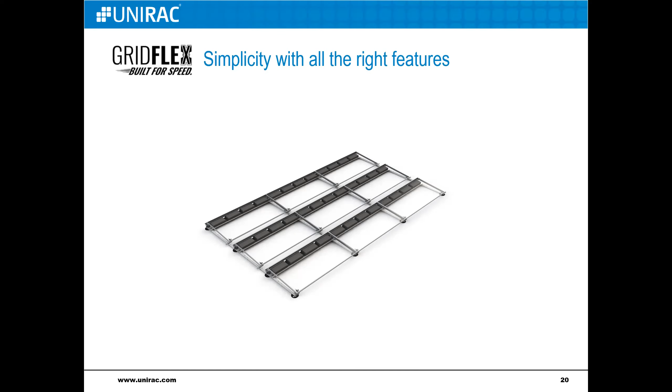So first we'll just walk through the components and give a little tour of GridFlex. This is the array with some clear modules so you can see everything there. The foundation of the system is a network of rails that run north-south. They are hat channel shaped. They're very robust compared to other grid-based low slope ballasted systems that are out there.

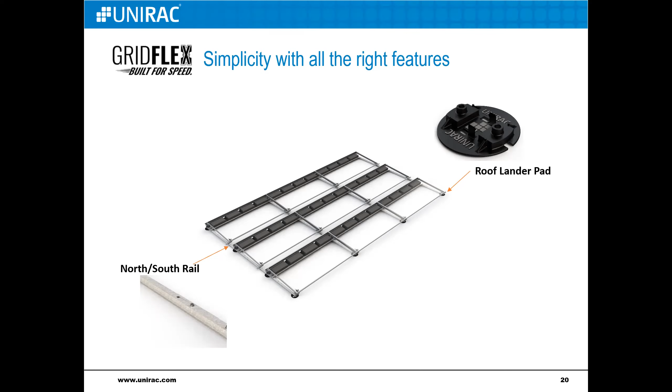There's a roof lander pad. This goes to that roof undulation question. There's a nice picture of these being stacked. So these are stackable for roof undulations. GridFlex does handle roof undulation up to 5 degrees total angle change. But once it gets above that, you'll see the rails actually floating. It won't be putting stress on the modules like a bay system might, but it will actually hold that structure. So you really will see very clearly when you need to shim a GridFlex system.

The ballast tray makes up the east-west structure, and it is a superior east-west structure to our competitors in that it is a solid tray. It's not two pieces of angle running east-west. It's a solid tray that maintains that structure and keeps the system square. So you have the rails running north-south, and then the ballast tray, which also is fully containing that ballast block. So any crumbling or cracking that might occur over time, that ballast weight will still be in the tray and applied to the system.

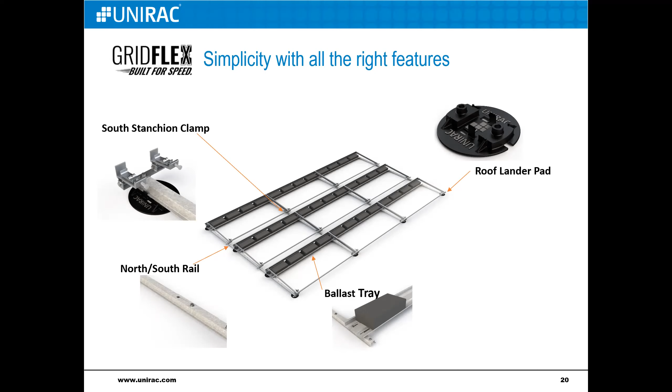Then there's the south stanchion clamp, which we'll take a closer look at in a few slides here. That is a hinged clamp for module access, and it's a shared rail system. So that single clamp is going to mount one module on each side. And same with the north stanchion clamp, which we'll get a closer look at here shortly. That is where two modules will meet.

And part of the benefit of the shared rail system is that it reduces the number of components required. It makes the install easier to do, easier to lay out, but also you have about half of the components and loose hardware compared to some of our competitors.

The wind deflector is the final component. This is only used on the north edge of the array. It is not required in the field. The system has excellent aerodynamics due to the location of the ballast tray, which is essentially where the wind deflector would have gone. There's not that much space between the ballast tray and the north edge of the module.

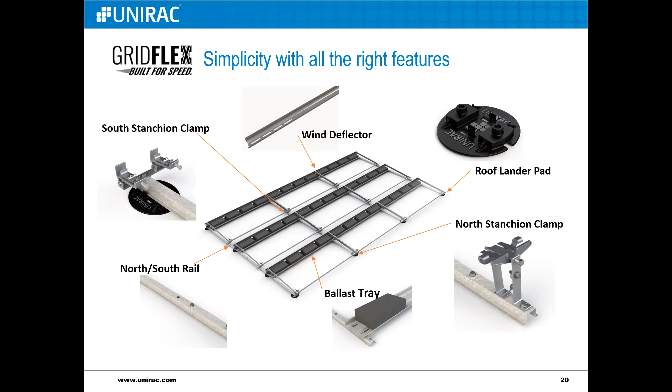So that ballast tray does a great job of acting as a wind deflector, to the point where, with the added cost of the wind deflector, you don't really see the benefit in reducing the ballast. So it's a light system already. So we're only using those on the very north edges.

So a little step-by-step closer look into these components. This is the roof lander pad, which snaps onto the rail. And there you see, they can be stacked up to 4 for roof undulations. You get a little bit more than 3/4 of an inch every time you stack one of these.

So that is ample room to make up for those roof undulations, especially on the smaller ones, like we just did for example, an apartment building, where drains tend to be in the middle of the roof rather than draining out to the edges. And that gives you these really low points where, if you didn't have these shimmable bases, you might have to break the array there to account for the roof undulation.

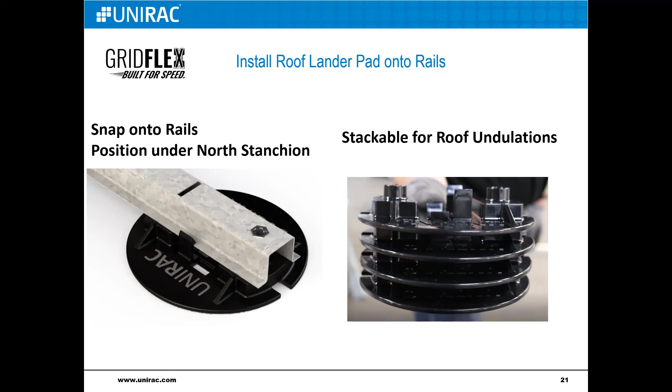So some advantages here with the roof lander pad. It's a durable PC ASA resin, a common material for outdoor applications like boat hulls, or the casing on your car's side view mirror, for example, is using the very same material.

So the rails are made up of modular sections. There's a south rail, a mid rail, and a north rail. And each row of modules, we're going to add 1 row of rails. So that also is an advantage here, applying the Bay system philosophy to a grid system. So the strength of a grid, but being able to build it in a modular process.

So if you have a jog in an array or a stair step or a module or a section that's missing, it's very easy to design this in a modular way and even change as you're discovering obstacles potentially that were not documented when the design was made.

The way these rails connect, you see in the close-up image there, it's a little hard to make out, but there is a scale for the module width at the 2 different row spacings. What that is for is if you have a 39-inch module, or in real life it's going to be 39 point something, let's say 1/6. This scale is in half-inch increments, and it allows the installer to repeat the measurement without a measuring tape.

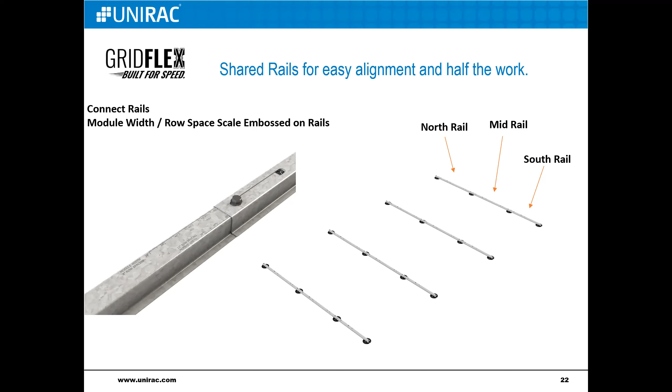So if you have a group of installers, we just need to communicate what setting to put that at, and then they do not need to measure out anything as they lay these rails out. So that 39 and change module width, we would round that up to the 39.5-inch setting for whichever row spacing you were using, whether 8 or 11.

And that way, right when you get up onto the roof, you can start laying these out without having to measure a single thing. And this also helps tell where those roof undulations are as you connect these rails. And that's just a single bolt that connects at the overlap.

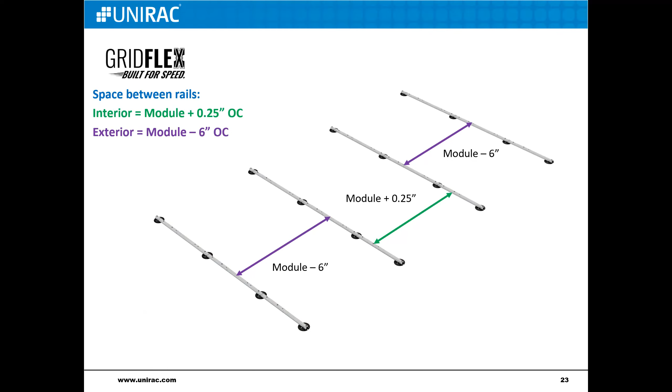The next thing that you need to do once you connect these is space the rails out. And this is another advantage of the shared rail system. The main dimension that you need is a module width plus 1/4 of an inch. And that's going to be the space between rails at the interior of an array. At the exterior, we're going to bring that rail in 6 inches so that it's tucked underneath the array. And those are the only 2 measurements that the installers need to know to build this system.

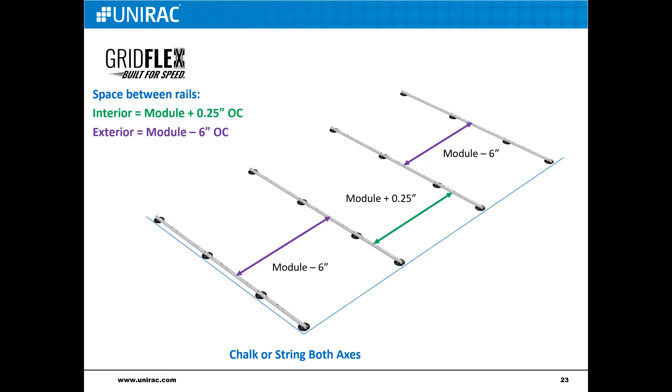And it's recommended to build a jig, which I'll show shortly here too. And that way, when you are spacing the rails and you have that overlap scale on the rails, all you need, just like a bay system, is a straight line at the south edge or north edge. You could start either north or south, and then a chalk line at the east or west, just to keep yourself straight as you're laying these out and adding modules. So very minimal measurements required, just like a bay system.

And this is an example of building the jig. We actually do this without a measuring tape with solar mount. So we take a 1/4 inch bolt and slide that to each end of the module that we're going to be using, and then just tighten that and make sure that what we're sliding to the module frame is the thread and not the nut, as you see in the picture there.

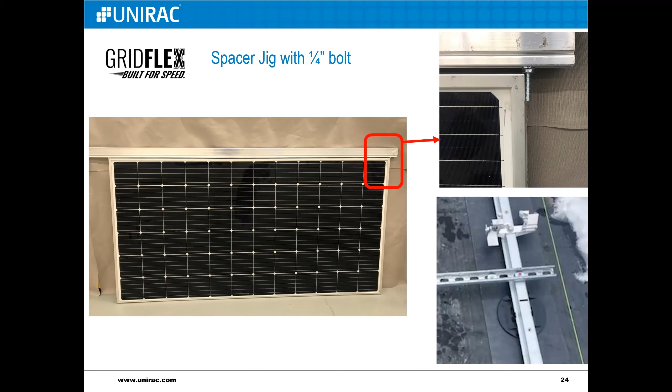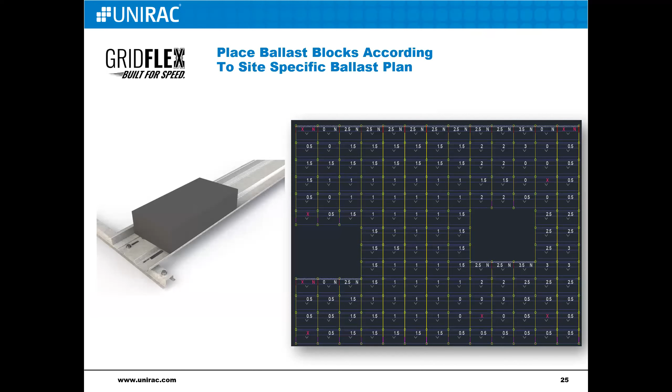And that 1/4 inch bolt drops right into the 5/16 rivet nuts that are pre-installed into the rails. So you can use that 1/4 inch bolt, drop it right in from one rail to the next, and now your rails are spaced exactly a module plus the 1/4 inch on center from rail to rail. So you really don't even need a measuring tape to install this system.

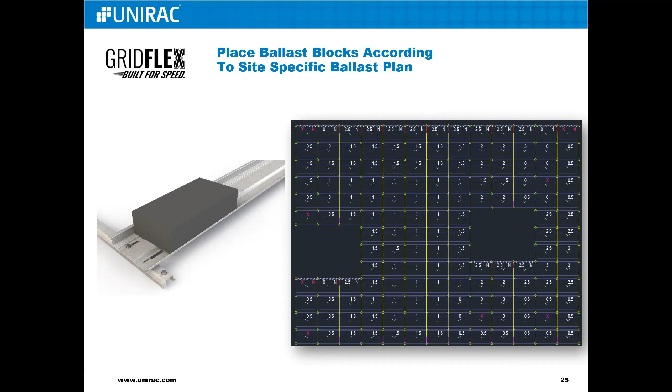So once those rails are laid out, we're going to start installing ballast trays and placing ballast blocks according to the site-specific ballast plan. This is critical for any ballasted system, that you will have a site-specific ballast plan. It's important that it's followed with the exact ballast count for each location. And as we encounter obstacles, which is very common on flat roof systems, we want to redesign that so that we can appropriately ballast. So it's very important to communicate that back to us.

And here's a close-up of those clamps, and to describe what we mean by more secure and the 3-point clamping. This clamp for the south stanchion that you see in the animation is supporting the module from the inside where the bonding happens, as well as from the outside, and fully supporting the bottom of the module for snow loads. So the strength of a module comes from the box of that module frame, and this clamp and the north stanchion, as you can see, are fully supporting any downforce that might be seen from snow loads.

Another example or advantage here is as that module gets hinged down, and those are hinged for installs and also O&M access. And I mentioned the bond pin is in that south clamp. You can lay that down and have a really nice resting place on the north stanchion clamp. And you don't need to move that north stanchion clamp at all to tighten it. So once you're laid down, you can do your wiring.

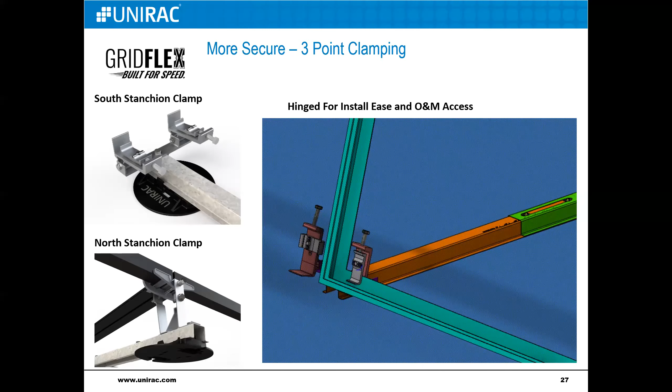And then when you're done with your wiring, you can tighten the stanchion to both modules. And that north stanchion clamp also grabs the outside, inside, and supports the underneath of the module. So that's what we mean when we say more secure with the GridFlex system and this 3-point clamping.

And here's an example of some wire management. We showed the Eco Tray. Eco Tray does run north-south underneath the GridFlex system. So it does fit underneath the ballast tray. It does not run east-west, the Eco Tray, but it is great for north-south. And here what we're seeing with wire management is an example of an optimizer for 2 modules and some props that the installers made to help take advantage of that hinged module action.

So part of the south clamp and having the bond in there that's nice is the whole time that they're working on this, those modules are bonded. They don't need to be fully installed, and each module, the bonding grid is totally redundant. So everything is bonded north-south and east-west. And having the bonding in that south clamp that hinges makes it totally safe to be building and know that you are bonded.

And then on the right, you see it's a nice clean look. There is nothing sticking out on the south edge like there are for all of our bay systems, which have a bay kind of taking up valuable real estate on the south edge. GridFlex is completely clean on the south along the east-west edges. And there's a very minimal amount, maybe 2 inches, sticking out in the north beyond the north stanchion clamp.

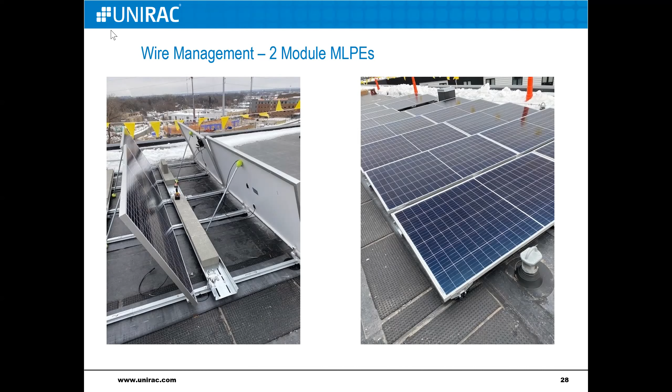One of the install advantages with GridFlex compared to the bay systems, I should mention, is the flexibility in process. With the GridFlex system, you can build the entire grid before you start laying modules, whereas with a bay system, there's no way to build the racking without the modules. The racking and the modules really are one. Whereas with the GridFlex system, you are able to build the whole rack and then add modules later. And that can help with any supply delays on the modules, which we certainly hear about.

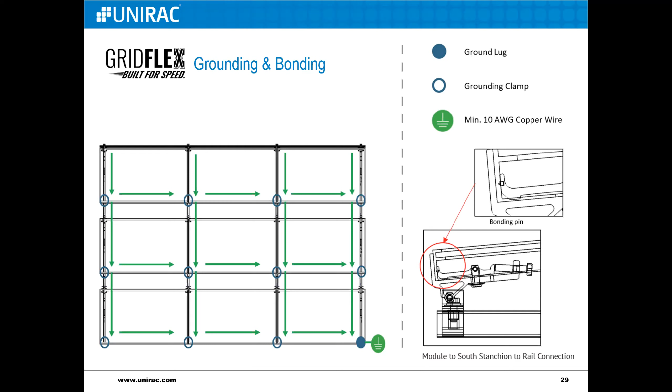And this is just a close-up showing that bonding pin. So that is where the bond happens. And the bond is on both of those south stanchion clamps, so each module is actually bonded in 2 locations. And again, that bond is not broken if you're hinging that module up to service the optimizer or whatever O&M activity might be necessary. So that's the overview of the GridFlex system.

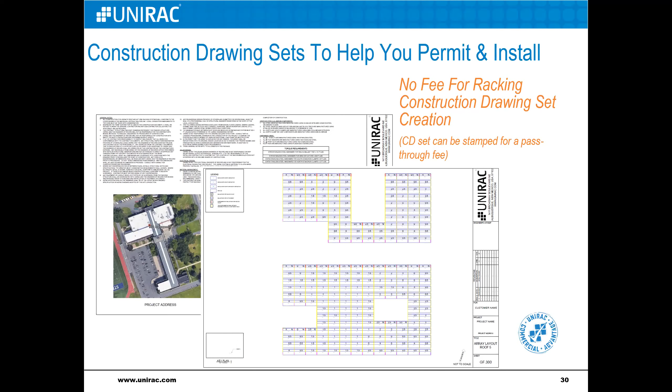I'll just quickly talk a little bit about the services we offer to support GridFlex and all of the systems. Construction drawing sets are free for you. You can take advantage of our UBuilder design tool to create designs, as well as leaning on our design team. So it's not just an online tool that's going to spit out a design for you. We have a team that can work with you if you have questions, to check your ballasting, to create these construction drawing sets for you, and really create a package that you can go to permitting with confidence.

And this is a rundown of expected turnaround times. We turn out somewhere around 150 designs a day. It's a huge volume, and that is due in large part to our online design tool, but also we have a huge team of designers who are looking over these systems and working with you to, for example, get a PE stamp, which does have a little bit of a longer lead time.

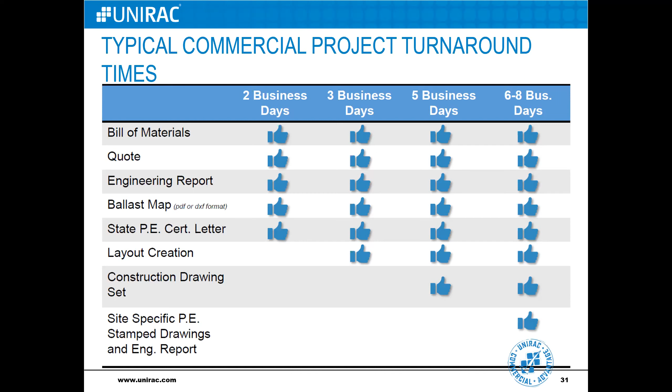The site-specific PE stamp drawing is the most in-depth and the longest lead time, but that's only 6 to 8 business days. So these are great turnaround times for you to first just get a bill of materials to get your quote so that you can go and sell your project, all the way through to construction drawings that are going to help you get your permit, and then the PE stamp that might ultimately be necessary for your project, all with really great turnaround time.

Each of these ISS team members averages about 10 years of solar experience, and that's really hands-on experience. So they've seen it all, especially with the Unirac products. So if you're using a new system like GridFlex, for example, we definitely want to get an ISS team member out to make sure that it goes smoothly. All the questions are answered in an installation manual, but in our experience, installation manuals are maybe not the most common documents found on job sites.

And it's great to have an ISS team member to cut off that learning curve, where there might be a question that would be answered in the install manual, and you can just turn to our ISS team member and ask that same question and get the answer immediately. Or if they're not there, of course, you can always call us or call one of them to get that answer immediately as well.